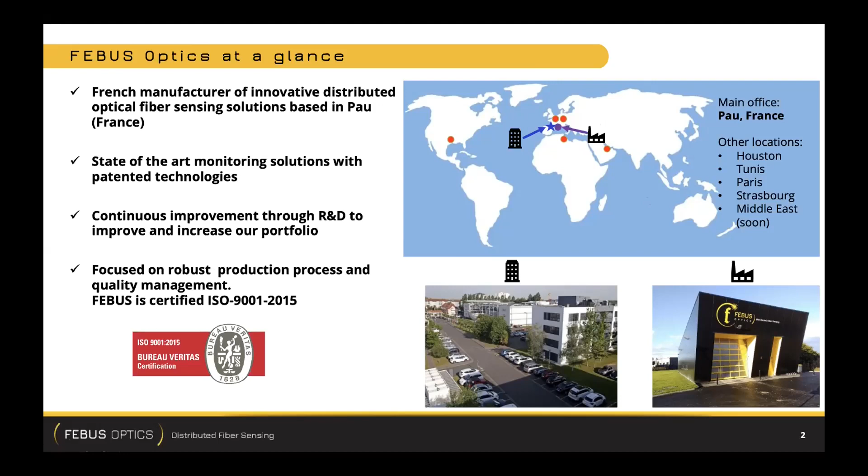We have several facilities. In France, we have 2, both in Pau: our headquarters and our test center. I will detail this a bit further. And we have commercial antennas in Paris, Tunis, Houston and the Middle East. And we have a geophysics antenna in Strasbourg with 2 people. Here are a couple of fields of work of Febus Optics, some places where our devices have been deployed, and some of our customers. It's not the place here to detail that, it's just an overview.

So the technology we are providing is called distributed optical fiber sensing, or briefly distributed sensing. So basically we are providing these boxes. Here is a typical box. It's a rack, an optoelectronic system, and this box launches a pulse along an optical fiber, which is always inside a fiber optic cable.

This pulse of light propagates through the optical fiber, and along its propagation, a small amount of the light is lost and goes back to the device, propagating backwards here. And we analyze this light to recover information on acoustics, temperature, and strain.

One of the good properties of distributed sensing is that you can locate your measurement very accurately, because you know perfectly the speed of light inside the optical fiber. So if this light has been created at one location, you will receive it here at one time. That's the way you locate your measurement. Then it's as if you had plenty of sensors along the cable, typically 10,000 sensors of temperature, strain, and acoustics along the fiber from start to end.

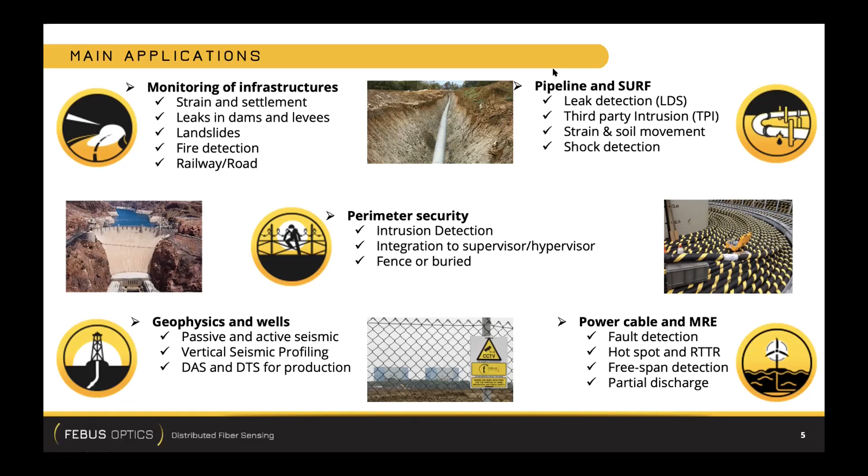So this offers a lot of possibilities in terms of applications: globally, monitoring of infrastructure, such as landslide detection, settlement detection, leaks, fire detection, or railway or road traffic. A lot of applications are imported from oil and gas, for pipelines and subsea umbilicals, risers and flow lines.

For third-party intrusion, meaning anchors or damage on the infrastructure, ground movement, shock detection, and of course perimeter security, because you're running acoustics, so you can hear things and detect intruders. Power cables in marine renewable energies, for fault detection on electrical cables, real-time thermal rating, detection of suspension of the cable, what we call free span, or electrical events such as partial discharges.

And then, last but not least for today, is geophysics and wells. We can do passive and active seismic. We can do temperature profiling. We can do vertical seismic profiling with active seismics, and production profiling as well.

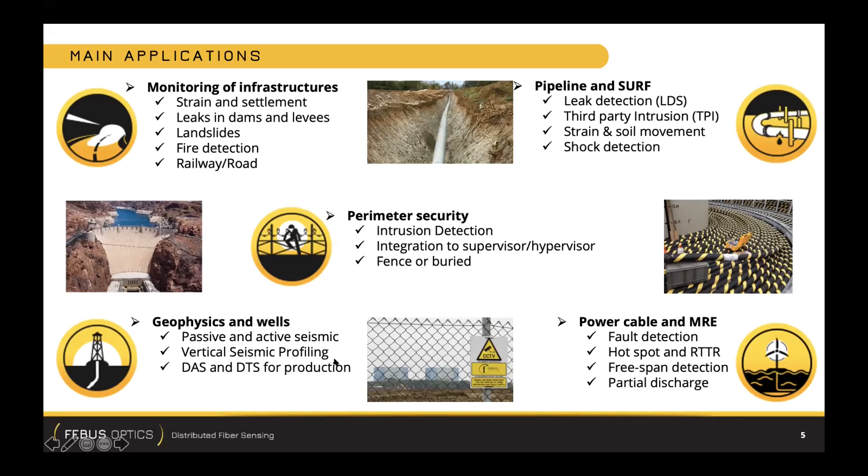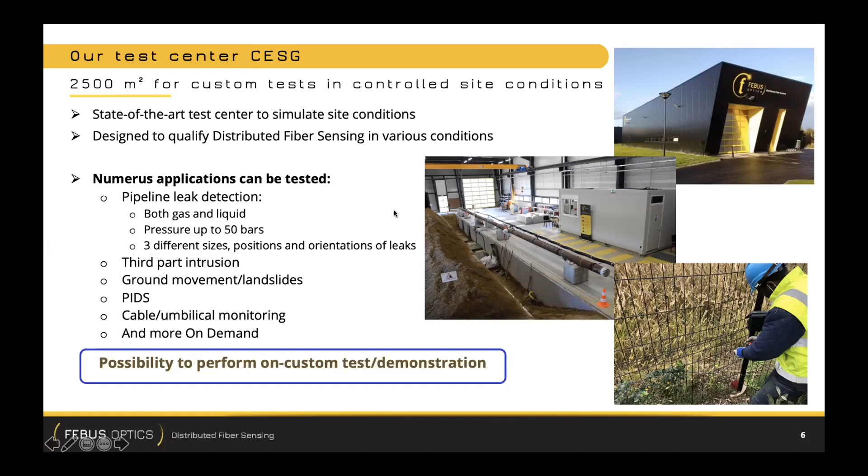Just one slide to give you an overview of our test center. It's called CESG, for Centre d'Essai Sophie Germain. It's in Pau. It's a place to test and demonstrate the distributed sensing solution in real life, meaning we have tools to reproduce ground movement, leaks on pipes, tension, bending, or whatever. And this is a very, very nice tool for us to test all the technology in real conditions, or let's say fairly representative conditions.

So now I will start the techniques. I will present first the fiber optics and all the technologies associated, then measurement, and then I will focus on wells, and I will conclude on what Febus Optics performs in the MIT project.

So fiber optics, or optical fiber, you can call it. It's a silica bar, very thin, like thinner than a hair, very pure, and it's manufactured by vapor deposition with dopants, meaning it's not pure silica. It's doped with germanium dioxide, fluorine, and many other dopants. These are particular molecules, and they are used to radially vary the optical index profile. That's how we make the guiding properties of an optical fiber.

Indeed, the optical fiber is composed of an optical core and an optical cladding. The light is propagating into the optical core, and the optical cladding acts as a barrier for the light. And this optical device, core and cladding, is surrounded by a plastic coating, and this plastic coating can vary. The composition can vary, and it depends on the conditions of usage.

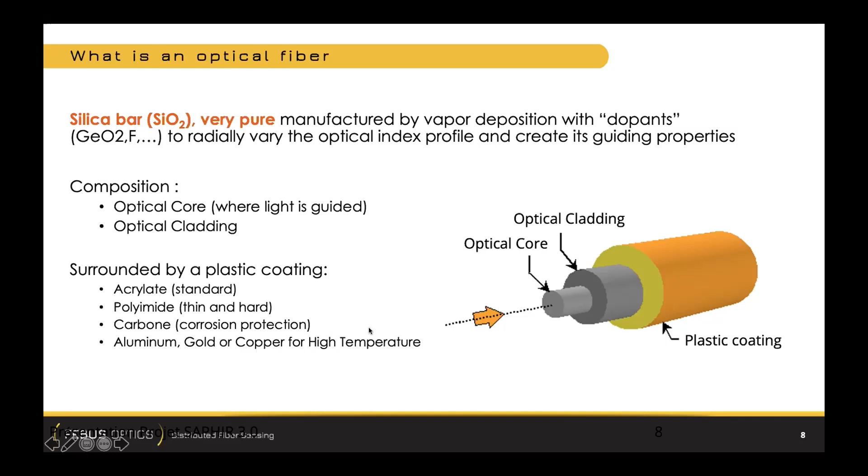As a standard, it is acrylate, which is a very soft and smooth plastic. But alternatively, it can be polyimide, which is in much thinner layers and with a huge hardness compared to the acrylate. This is for when you need fairly high temperature. And you can use carbon. The carbon coating will act as a chemical barrier, and we will discuss this further. Aluminum, gold, or copper coating can be used in order to endure very high temperature, up to 700 degrees in certain applications.

So as I said, first you will manufacture a preform of the fiber. What is a preform? A preform is, let's say, a mock-up of the fiber, but very large. So it's like an optical fiber, but instead of being a 100 microns diameter fiber, it's like a 1 meter diameter fiber. So you put this preform on the top of what we call a tower, and then with an oven, you will reduce homothetically the size of the preform to get a fiber.

And then you have this fiber, with the same parameters as the preform, but at a much smaller scale. And then you control the optical diameter, you put the coating, you control the OD of the coating, you control the speed of everything, and then you have the final product. And this is optical fiber as you can buy it in the market. So we start with the preform and we finish with a 125 microns hair, coiled onto this drum.

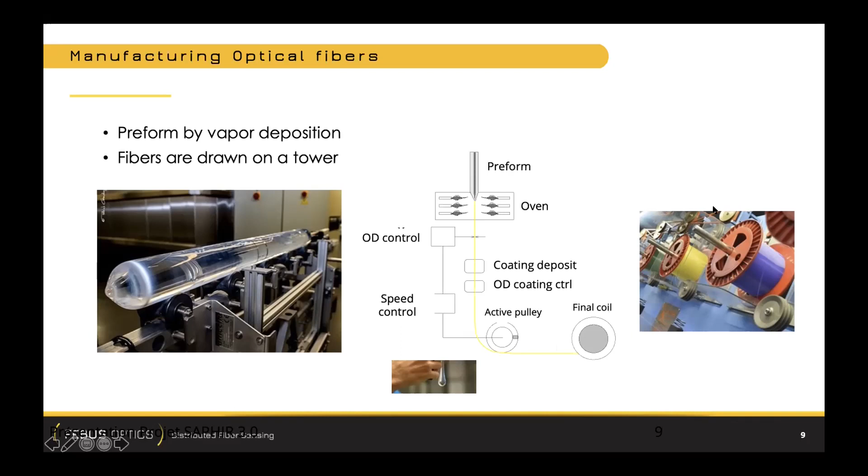So there are different types of optical fibers, basically 2 types: multi-mode fibers for short distance and single mode fibers. So here on the top of this figure, you have a large core multi-mode fiber. You can consider your fiber as, let's say, a tube with a wall. The wall is the cladding, the tube is the core. And then it's like you play snooker with rays of light. You have this total internal reflection guiding the light. But as a consequence, the ray going straight arrives on the target earlier than the rays going left and right. So this is a step index multi-mode fiber.

But life is better than that. Engineers have designed gradient index multi-mode fibers. Then the light is not going straight, but it's curved. And at the end, everybody arrives at the same time, and you don't have what we call dispersion. And moreover, the second type is single mode fiber. Then the light is trapped into a 10 micron core. And there is only one mode. That's why we call it single mode. And this mode is going straight to the point. So there is no modal dispersion because there is only one mode.

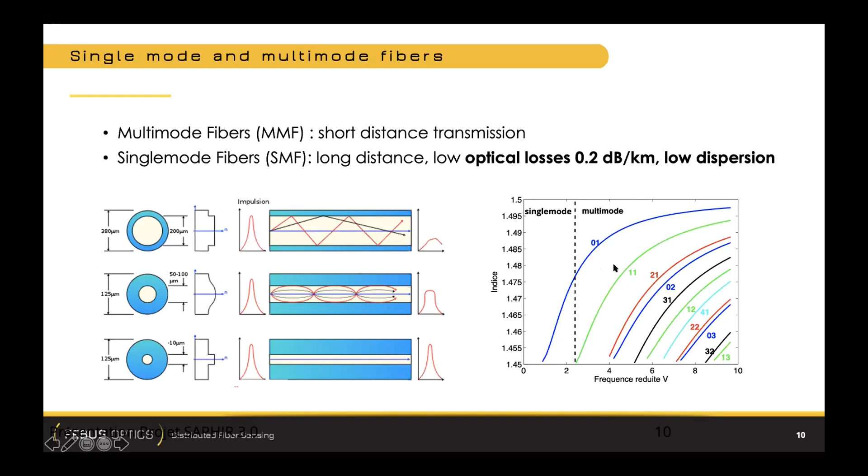Okay, now we have seen what is an optical fiber. It's basically like a hair of 125 micron, but this hair, you have to protect it. So you will put this hair into a cable, a composite cable. And it's always the case. You will never deploy for any reason just a fiber, maybe except in the lab, but in the field it's impossible. So you put this in a cable, and the goal of the cable is to protect the fiber from unexpected or unwanted environmental conditions.

But still, if you want to be sensitive to something, you have to do some trade-off on this. So it's dependent on application, communication or measurement, for example. For measurement, you will enhance the coupling. For communication, you will enhance the protection, because what matters is what's going inside the fiber, the message, the communication. And it will depend on external conditions.

You won't use the same cable for high pressure, high temperature conditions, or if the cable is submitted to shocks, to tension, to crush, to rodents, for example. Never underestimate the rodents; mice and rats can be very, very hungry seeing some cables around. So we have to protect the cable.

Then, as I said, protecting the cable is one thing for telecommunication, but protecting the cable from harsh environments, such as you can face inside wells, for example, is another issue. So for oil and geothermal wells, you will have high temperature or extremely high temperature, but basically 150 degrees can be a target. High pressure: hydrostatic pressure is barely more than 100 bars, and it can go up to 2,000 bars.

You will have corrosion because of sea salt, because of H2S or chloride. You can have hydrogen, dihydrogen, and the hydrogen is particularly dangerous for fibers because it's darkening the fibers. There is no transmission at all at the end if you put standard fibers into dihydrogen for several days or months. If you are in the ground, then you will face rodents. I already said that in the last slide. You can have other chemicals if you are in a chemical plant, for example. And in nuclear environments, you will have gamma rays, so you will need very specific fiber.

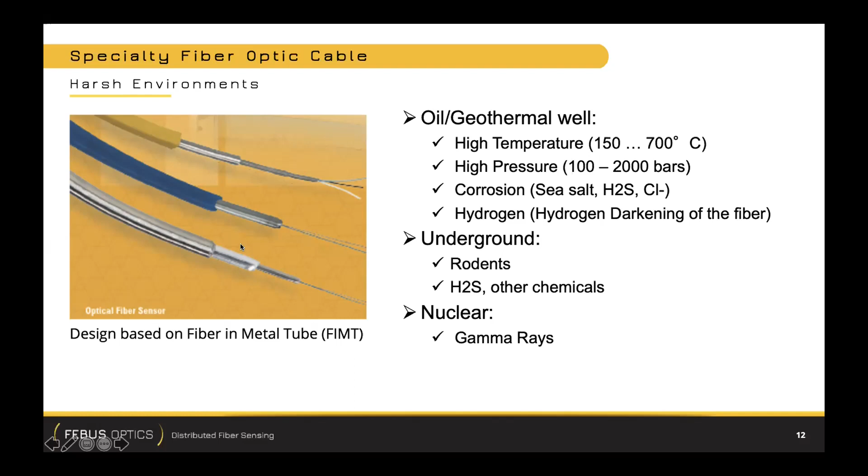Then we have seen how to protect the fiber, but sometimes you want to couple the fiber because you want to measure something. So if you want to measure something which is outside, and if you want this outside to be visible inside, then you need to think about coupling the outside with the inside. And this is done by the cable. So you have to think about the cable composition.

Of course, if you do such a splice into a well, you will have to use special splices because you have special fibers. You have to use special protecting sleeves here to maintain the splice along high variation of temperature, and use specific encapsulation with metallic things such as the one you can see here.

So it's the only way of measuring static strain, but it can be used as well to measure temperature. And if you want to measure one and kill the other, then you have to use maybe two cables, for example, one tight, one loose.

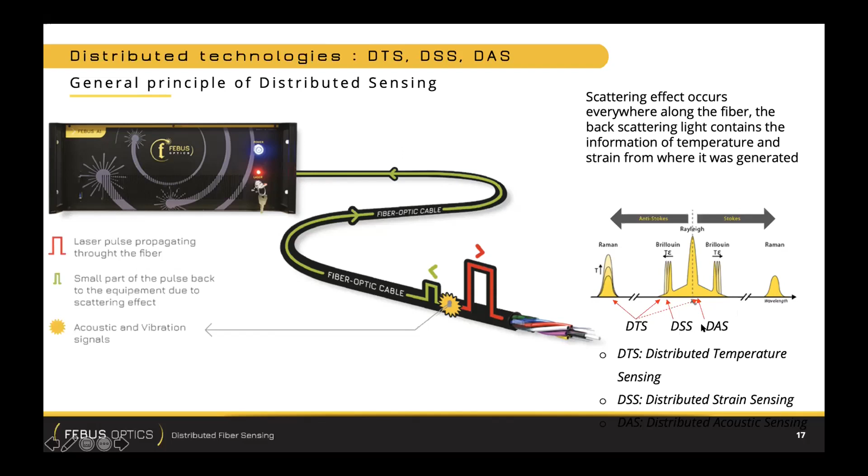So this is basically commercial. Febus is offering three. So G series is Brillouin, A series is acoustics, and T series is Raman temperature. So let's start with the easiest. So Raman temperature measurement. It's very, very often used to monitor wells during production, or just for temperature profile. You run a fiber down your well, and then you have this vertical temperature profile.

So what you have to have in mind, it's a very well resolved temperature. So you can achieve repeatability of the temperature, meaning very good accuracy. It's not the same, but accuracy between successive measurements is about 0.01 degree, which is a very, very low change.

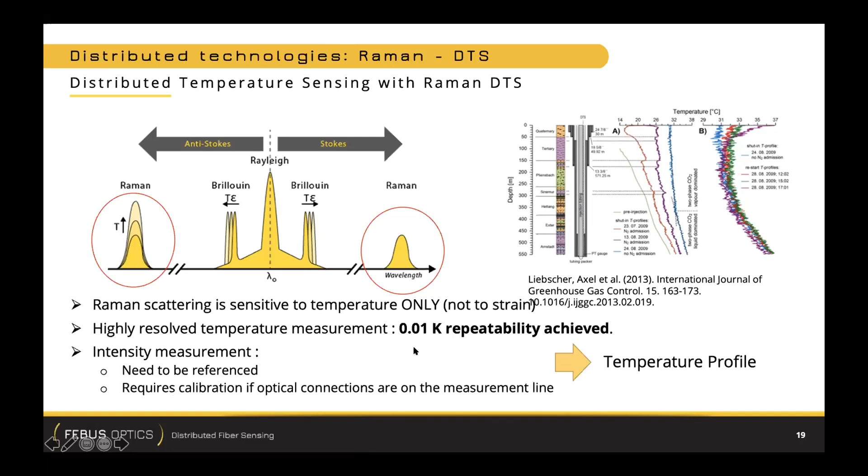Another principle is the Brillouin temperature. So it's G1 at Febus. And then you will track a frequency. Sometimes it's easier to track frequency because you have this property of being insensitive to losses, meaning you have a connection and then you disconnect because you are going to do maintenance on your system, or you have work to do on the well, and then you reconnect 1 month, 1 year, 10 years later, and then the frequency hasn't moved. Maybe the losses, yes, but not the frequency.

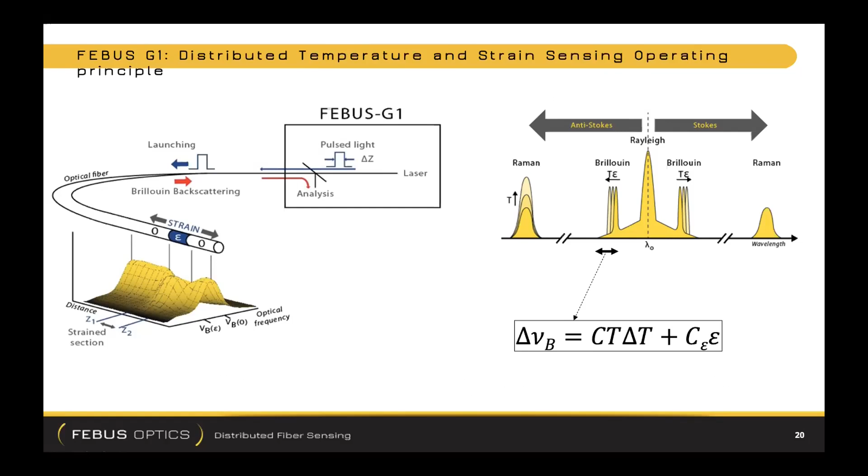And this frequency is the one which is sensitive to temperature and strain epsilon here. So that's the good property of Brillouin sensing compared to Raman. It's a little less sensitive to temperature, or a little less repeatable. It's more 0.1 degree, which is quite a good performance, but sometimes in wells you want to be more accurate than that. And for strain measurement, it's very accurate. It's 2 microns per meter, meaning elongation. So you have 1 meter of cable, you pull 1 micron or 2 microns, you can see it.

And you can do one measurement. I say it's static, but you can go up to, let's say, 10 hertz, up to 15 hertz frequency. So here you have a typical distributed strain measurement. So you have strain here, time here, distance here, and we play here with this bar. And when we play with this bar, the bar is oscillating, and we can see it at 1 point because it's just 1 point where we are attached to the bar.

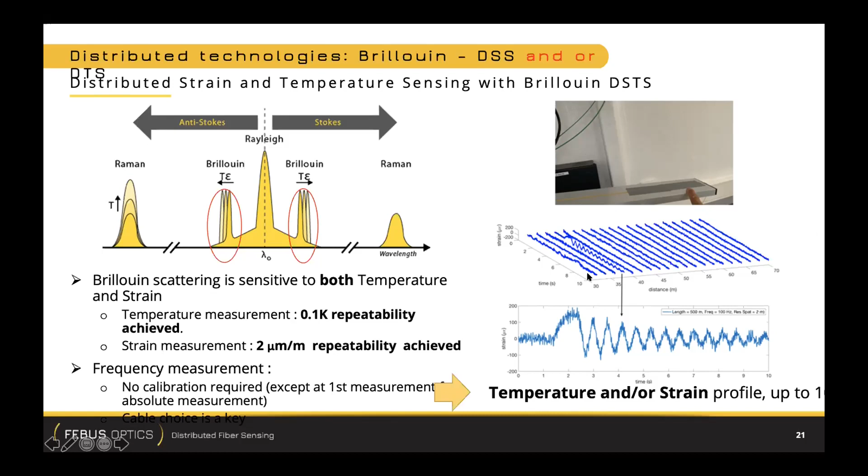Of course, you can measure temperature with Brillouin, and the good property is you can go to a higher range than Raman. So that's why most of the time Brillouin is used to measure temperature over very, very long distances, such as on pipelines, for example, or flow lines.

And then you will have this spatial resolution. So this is an important parameter. Spatial resolution is, let's say, the spatial accuracy of your measurement. So you will measure independently 10 meters here and then 10 meters after. You can go down to 1 meter with all the devices, but if you go very long range, you will have to take a higher spatial resolution. And you can see here, even at 100 kilometers, you can achieve 0.4 degree of accuracy.

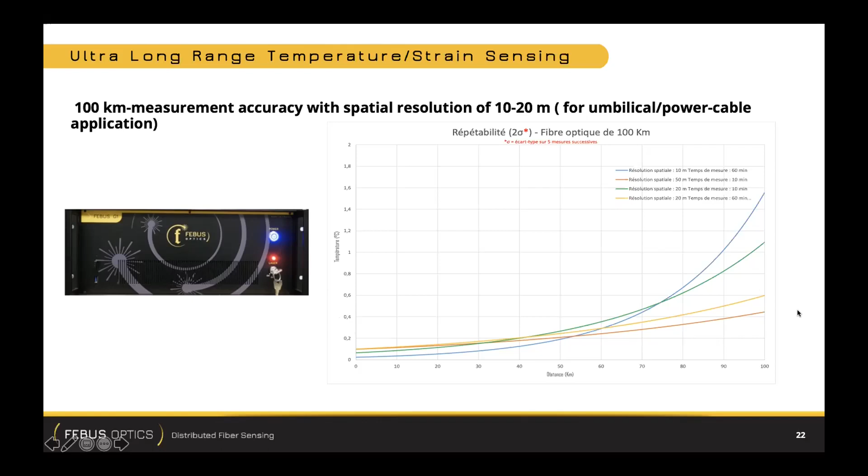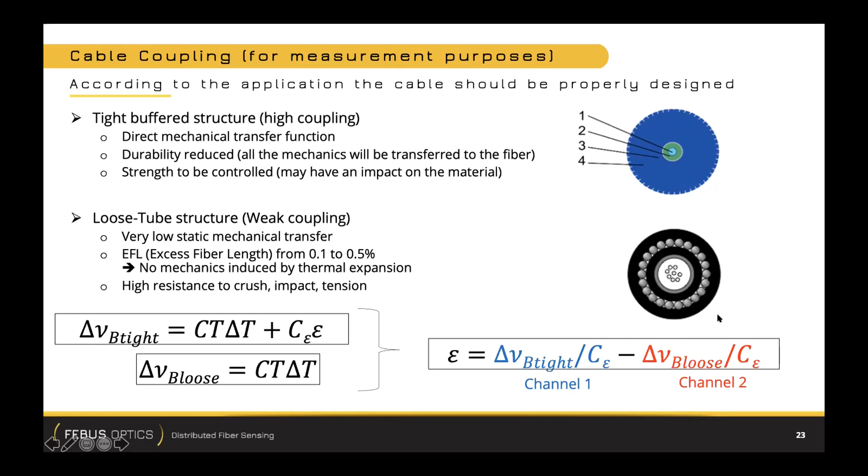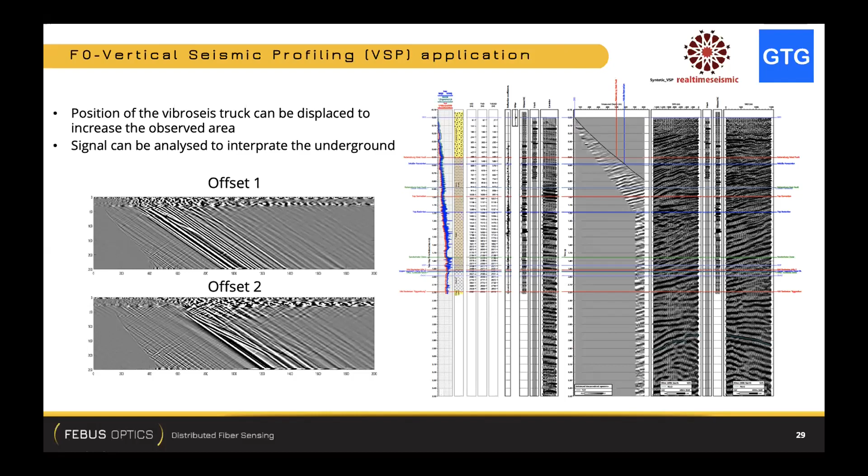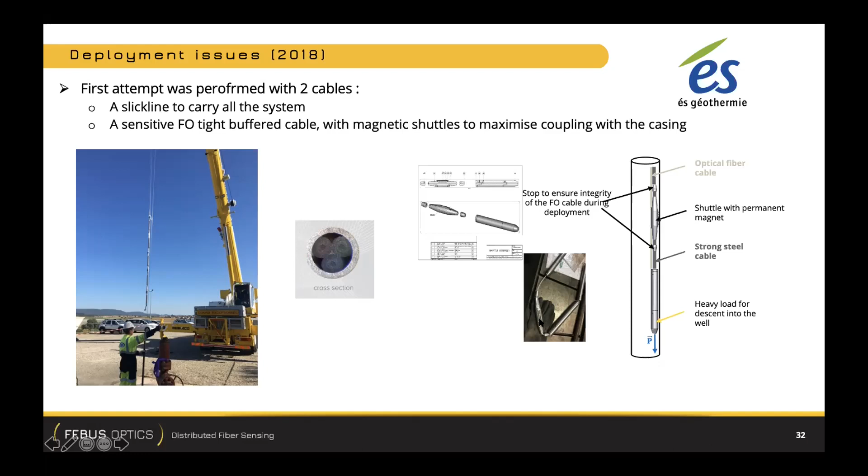So that could have been a nice shot. Unfortunately, it's very difficult over a long distance to handle the 2 cables at the same time. And so we failed to go deeper than 700 meters, which is not too bad for such an innovation, because these shuttles were not validated in a real well. So we succeeded to descend up to 700 meters.

But because we have Brillouin monitoring, we are sensitive to temperature and strain. So here you have your temperature gradient, but you can see strain. Here you can see a strain event measured just after deployment. And then 2 months after, the strain event had transformed itself into a break. So there were only 450 meters left in the well. So it has been used as a draft for a second descent.

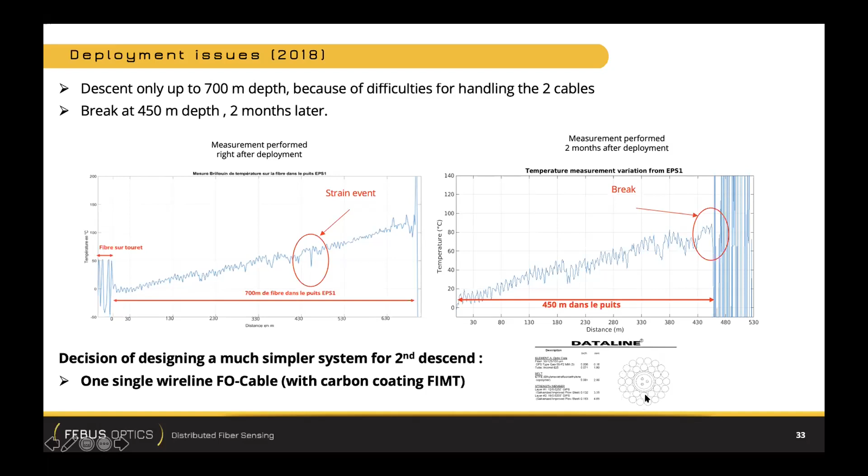So we decided to do something much simpler with one single wireline FO cable. So you have 3 fibers inside the fiber in metal tube, with a lot of reinforcement, allowing the cable to be self-consistent, meaning you deploy just the cable with a load at the bottom. And this has been successfully deployed along the whole depth of the well, so 2,200 meters, in September 2020.

And the first thing we have done is a DTS measurement. So it's the blue curve here, Raman DTS. And you can see the overlap between this blue curve, acquired just after deployment by Febus Optics, and the orange curve, which comes from data previously logged in the 90s. So you can see the accuracy of both measurements, which are overlapping perfectly. This here is due to the ambient temperature differences between the 2 measurements, which were decades apart. But you can see a perfect match. So it means the cable has been successfully deployed.

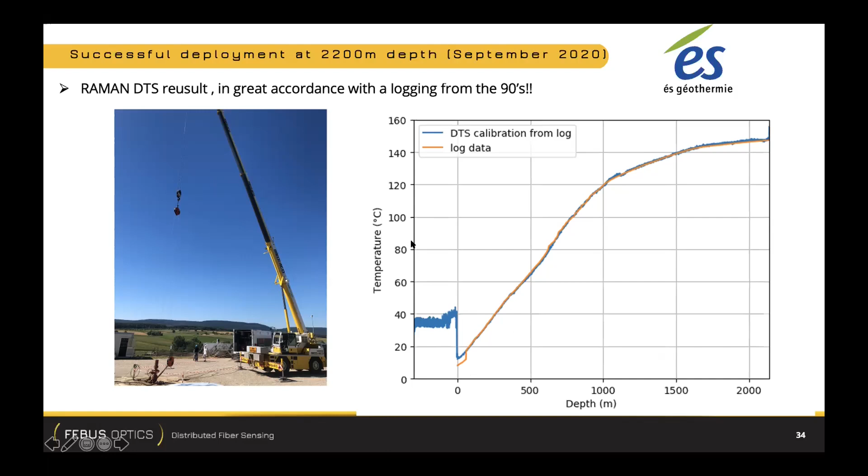Then in parallel, actions to study the aging of the cable, because it's one of the topics of Febus in this project. So we have put this cable in a geothermal bath here, 6 months, and performed aging test with, let's say, tension, traction test on the cable, and monitoring all along the 6 months, and after traction, of course, the optical losses.

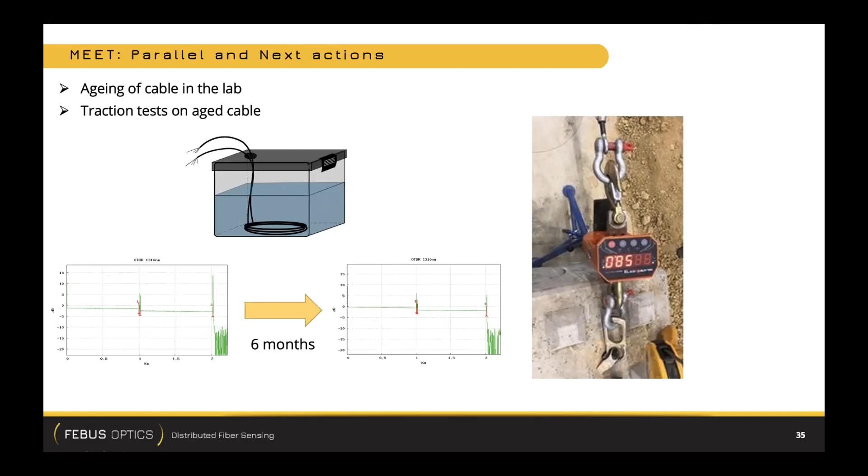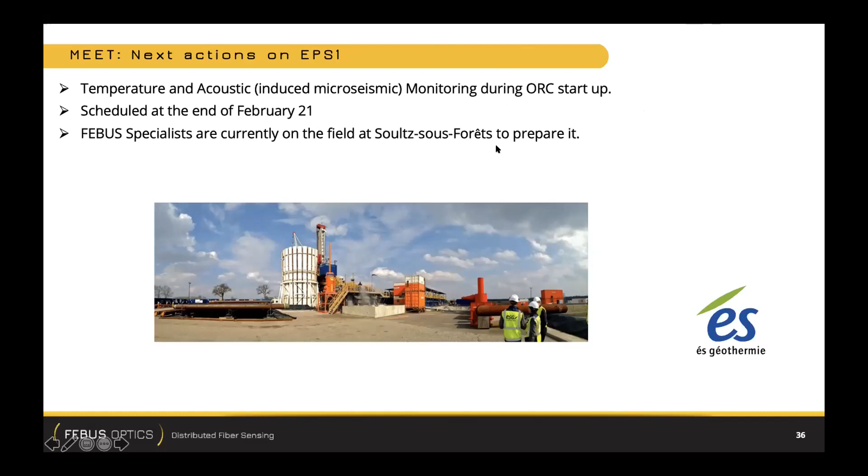And we have seen no variation, meaning that there is no damage on the cable, at least in lab conditions, without the temperature and without the constant traction we can have on the real wireline. So now our next actions on this well EPS1 will be to do temperature and acoustic measurement to track induced microseismics during the ORC startup, which is scheduled actually next week. And today, Febus specialists are currently on site at Soultz-sous-Forêts to prepare this test.

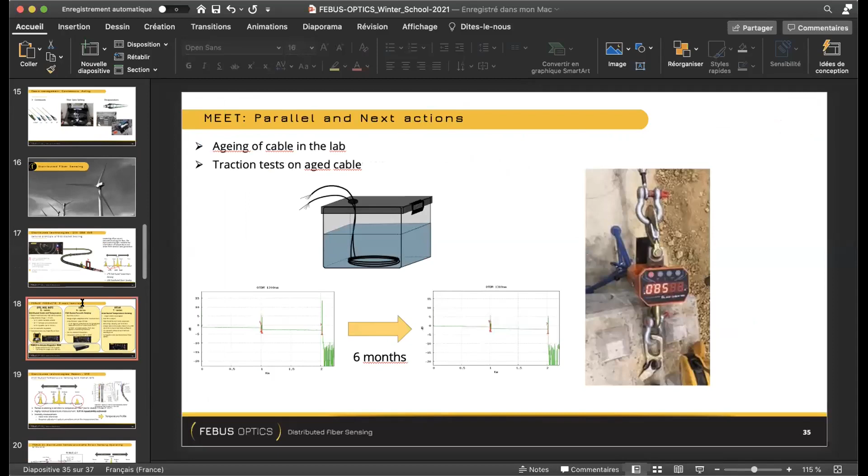What is the competitive advantage of Febus Optics compared to many other fiber optics based sensing companies? Oh, it's a very commercial question. So I will go to some slide. I actually skipped the slide, but let's say the main advantage of Febus Optics is to have in-house technologies such as Brillouin, Raman, and Rayleigh acoustics. So we are mastering all the technologies, meaning that if we have advice to give to a customer, we can do it without any bias, because we can provide all the technologies. So this is one advantage.

The second advantage we have, and it's mostly for universities, is we can give you full support from the device. We can sell the device and then give you full support to choose a cable, but with a partner, we are not providing our cable. We can do it, but it will be commercially available cable, and we can give full support without hiding anything. We can give you the raw data. We can explain everything from top to bottom, how it works, maybe as I have done today, but even deeper on any device, because our business model is to give the best device, not to sell service.